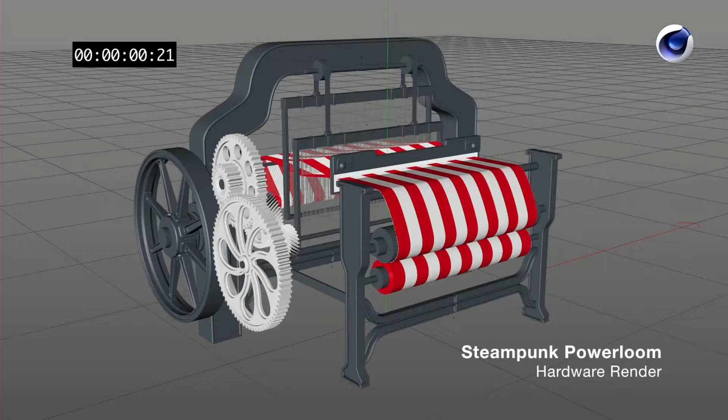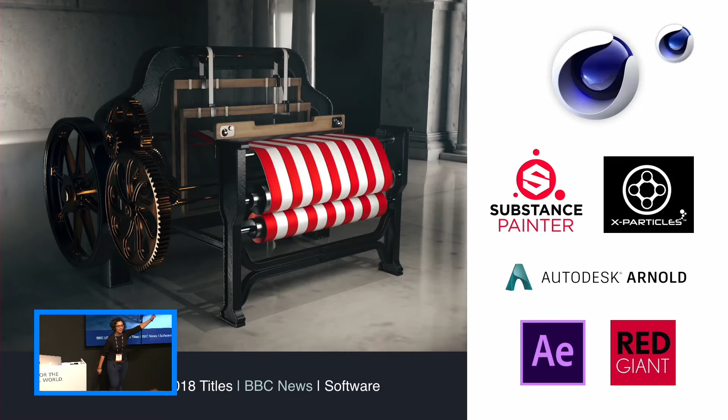So this was my workflow. Cinema 4D up there right at the top. It's my favorite application. I love it. Everything is Cinema.

And I textured everything in Substance Painter. So I kind of prepped all my UVs in Cinema 4D, exported it out into Substance, did my texturing, back into Cinema 4D, and then rendered it out in Arnold.

I use XP cloth particles for my flag, my wavy flag. Like I say, I rendered everything off in Arnold. And what I love about Arnold is I love anything hyperreal, and it kind of gives me that.

I did all my compositing, any kind of corrections, adding typography in After Effects. And I love grading, and I love using Red Giant's Magic Bullet. So I did it all in that.

But let's look at the top shot. And I guess the point I want to make within my presentation today is that it's actually quite easy. It might look incredibly sophisticated, but it's really quite an easy workflow.

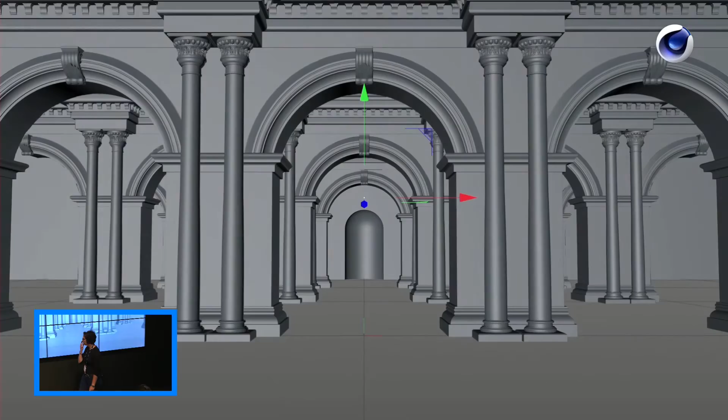So let's look at this opening shot. Let's strip it back. That's what I had within that scene.

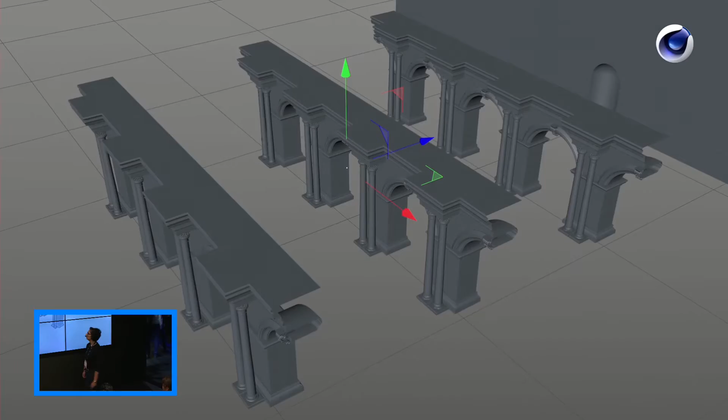Okay, so I had one arch. I duplicated it three times. I had a back wall. I had a floor. I've removed the floor because I really like the grid in this presentation. And I've also removed the centerpiece just for this part. So that's right. That's quite easy, right?

Let's go back. This time, let's look at our lighting rig. Let's fly through.

Again, incredibly simple. I've got an area light here that hits that first arch. It grabs the second arch as well. At the back here, we've got a soft light, hitting that back wall. So when that camera's looking right through, it lights up.

And then we have three volumetric lighting, and that kind of gives it that kind of mistiness feel to it. And yes, volumetric lighting does come at a cost, but it's worth it. And I ran everything across a render farm anyway. So that's our lighting rig, and that's shot number one.

Let's look at the dome. And in all honesty, the dome gave me a little bit of a heartache, because I was kind of thinking, right, how am I going to get into this building and not have it look like a mess? And initially I was thinking, right, I'm going to maybe Boolean that kind of dome downwards, but I thought, no, that's not going to look really sophisticated.

And then I've got the issue of my little character right at the top, and I'm thinking, what am I going to do with this character? But the answer was in front of me when I looked at the geometry again. And you've got nine different segments. So I just split all the segments up. And once I split them up, I just animated them down.

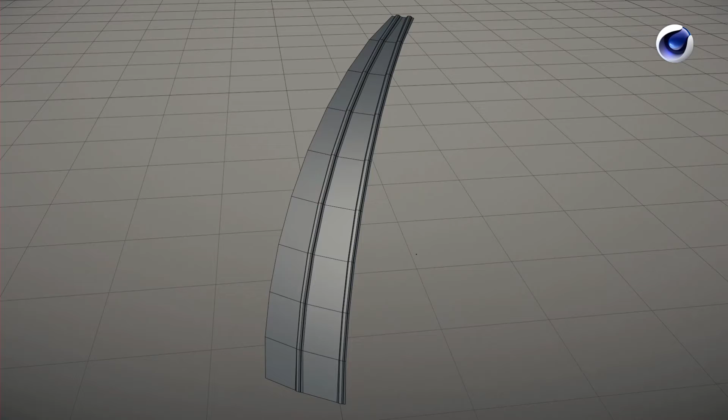And I thought, great, that's going to work, because that's going to echo the kind of steampunk theme. So you're kind of bringing the two together. And that's what I did.

So once I had one, it was literally just a case of running it across a radial MoGraph cloner, and there you go. So now, when it animates, they all animate at the same time.

But there was one more thing. It was too smooth, and I didn't like it being smooth. So I thought, you know what, I'm going to delete that Phong tag. And yes, some people might look at it and say, why is she using low geometry? But no, that's again part of the concept. I wanted it to look like low geometry, again to echo the mechanical side of steampunk.

So there you go, that's how I animated the dome. And that's the final shot. And I added a little bit of animation, a little bit of twist, just for a bit more interest.

And when I was working with this model, I kind of wanted it to almost look a bit like a Fabergé egg, that kind of expensive, like a little jewelry box opening up, and there's all these little things inside.

My chair, for me, the kind of chair and the power loom as well, my little stars. When I was looking for inspiration, I thought how am I going to design this chair, and then it suddenly hit me. I thought, you know what, I really love old-fashioned typewriters, like the old Olivetti typewriters. The answer was right in front of me - that looks like a chair seat.

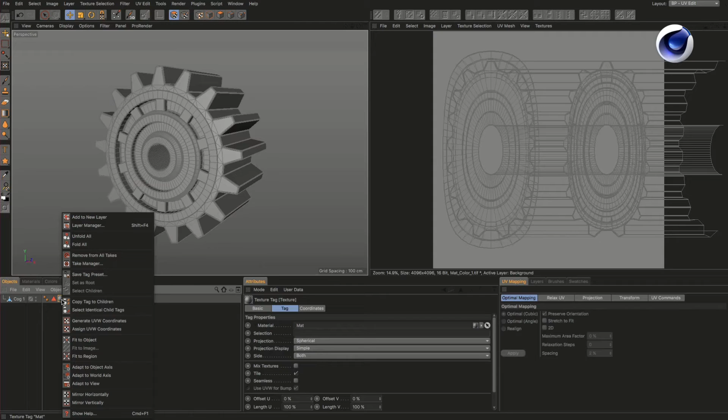So here's our cog, and we are in UV edit mode. We've got to go in and create a material now - it doesn't matter what resolution at this point. Drag and drop it onto the object, and then you've got to go in and generate UV coordinates, because that's your texture tag.

Let's go to the other side now, let's turn that layer off, and then have a look at this texture. It's looking wrong - everything is stretched and pulled, and that's never going to texture well. So I went in and optimized the UV mapping, optimal and realigned it a few times until it started looking right. And you can see now everything is beautifully unwrapped and nice and tidy, and that's how it should be.

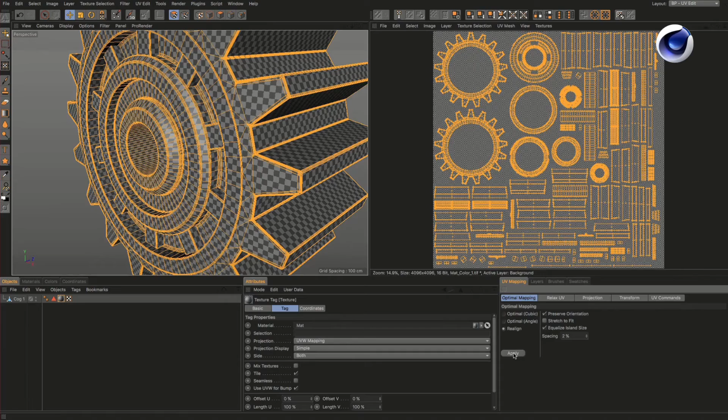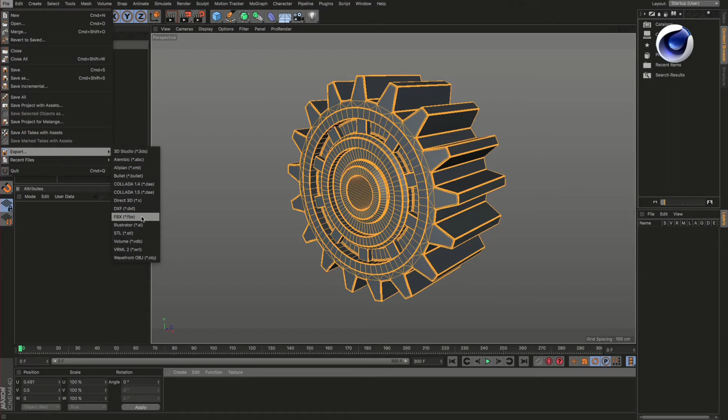Okay, so we are now back into standard mode, and we need to delete that material - we don't need it anymore. But make sure you go in and lock it, because if you lose that, that's not good. So let's just delete it. I exported things - I exported everything as either an FBX or a .obj file, depending on how it worked.

Let's go into Substance now, and we need to bake. So we're baking normals, world space normal, ambient occlusion, curvature, position, thickness. Here we go, that looks nice. So once I've baked everything, I can now start painting.

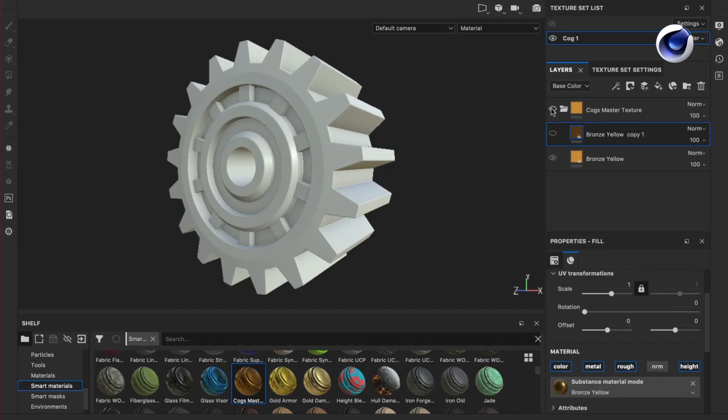So I created this material. Once I created one material for my cogs, I saved it as a smart material. And I duplicated the bronze yellow material because I wanted to create a mask so I can age it. So here goes.

There you go, just create a mask and add a generator, and crank some of these settings. Go global blur, global balance. Let's scroll down. Texture opacity, you see that's updating. Curvature opacity, that was a bit too much, so I went back into texture and restored some of it. I was happy with that.

So let's go back into Cinema 4D now. We're setting up our Arnold materials, so it's a standard shader. Let's open our shader network and just join all these up. There you go, diffuse, roughness, metalness. Watch that top left now. There you go, normal maps, height maps. And then let's go back into our main window and drag and drop that onto the model.

Let's have a look at it in the viewport. What I did was I kind of created a very simple lighting rig so I can zoom, move it around, just to make sure that material was working and looking how I wanted it to. So that worked, I was happy with that.

Again, this is the little star, just like my little chair. This is the power loom. And the way I designed this was you've got this wipe which reveals the flag being put together, and that's deliberate. So originally I had this wooden loom and I was thinking, okay, what can I do with this asset? And I thought, right, probably nothing. So I completely rebuilt it from scratch, like this.

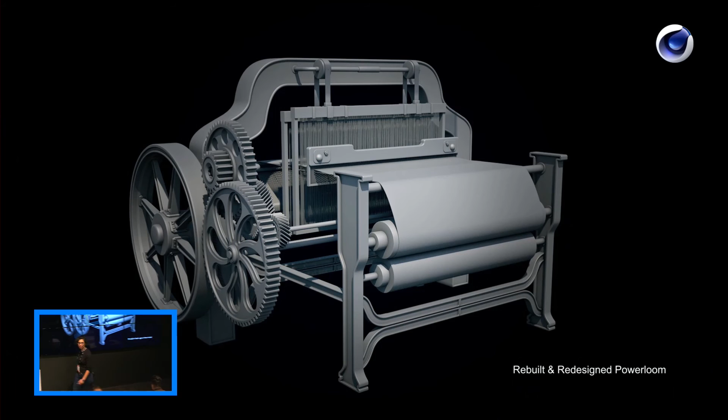Whoa, that's a bit fast. So yeah, I thought, well, I'm not going to be able to use this old loom I had, so I completely rebuilt it. And again, just like I did with the cogs, I put it into Substance Painter, textured everything, put it back into Cinema 4D. That's the Arnold render of just the asset. Let's wipe again, let's put it into the environment.

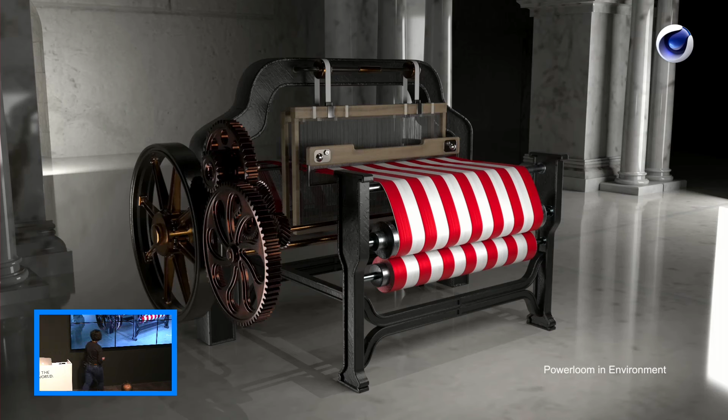But you know what, there's a bit of a hot spot here, and I had to fix that. So I rendered it on a background on its own because I didn't want to move the light, because I like the way the light was hitting on the power loom. There you go, beauty render with volumetric lighting - that kind of little mist you get with the volumetric lighting.

That kind of works, but it needs grading. There you go, there's grading - that was the final grade. And I was really happy with that. And here's the animation.

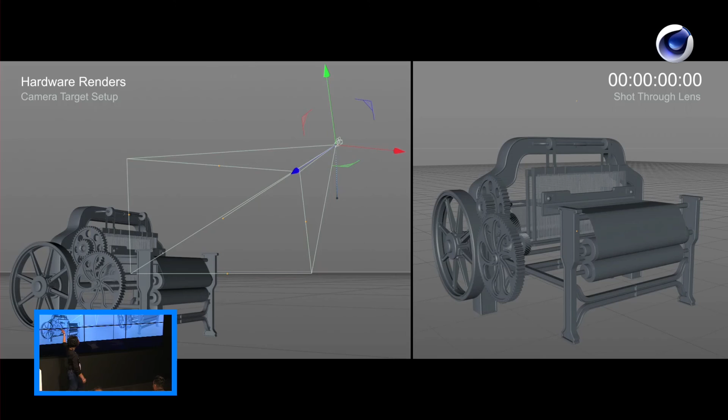So let's look at that camera. If you don't use target cameras, have a play with them because you can get some really cool dynamic shots with target cameras. What I did was I placed the target right in the middle of that power loom, and here's my camera. And look at the one on the right. That worked, it did the trick.

Now you're probably wondering, is she going to play this title sequence or not? I am. Here it goes.

So that's the BBC US Election Titles 2018.